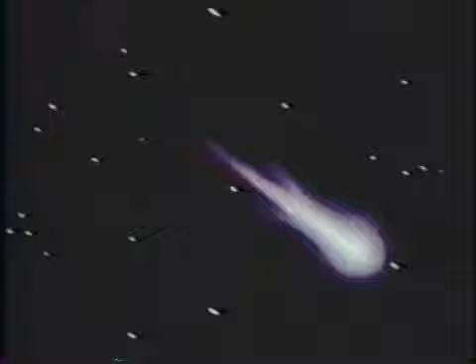There was a time when a meteor flashing through the sky struck man with a deep sense of wonder. Even today, man's reaction to a meteoric display is likely to jam the switchboards with reports of imminent invasion from space. But as heirs to the knowledge, disciplines, and apparatus of the scientific revolution, we are familiar with, and at least partially understand, the meteoric phenomena.

A meteoroid traveling in space outside our atmosphere remains unseen by man, for the molecules in space are so dispersed that collision with them causes no visible effect. If its trajectory traverses the Earth's atmosphere, it becomes a meteor. Here it begins to collide with more molecules. These collisions become more and more frequent as the meteor descends into the denser air of lower altitudes, causing it

to decelerate. Each collision converts some of the energy of motion into heat energy, and the heat continues to increase until the meteor itself becomes incandescent, scribing its visible path through the night sky. Destroyed in the atmosphere by this heating, most meteors present no danger to man. Now and then, one is large enough to survive its passage through the atmosphere to Earth. It is then called a meteorite, and some are very large indeed.

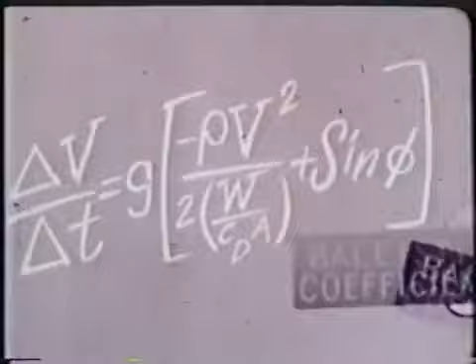Dr. Peter Parameter became interested in meteors early in his career, and once wrote a paper titled, "A thermokinetic description of bodies in passage through a plastic medium of nonlinear density at random velocities and angles," which could be just about summed up with this equation. With this equation, his fellow scientists and designers are able to explain the effects of atmospheric penetration on differing bodies, those with different ballistic coefficients, at various velocities and angles.

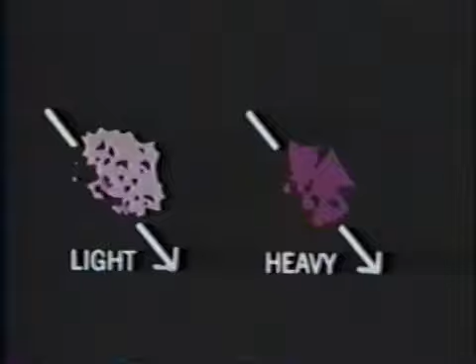For example, if two bodies of different weights enter the Earth's atmosphere with the same velocity and entry angle, both the heavy body and the light one will begin to heat up at the same time. But impacts of air molecules slow the light body sooner. This deceleration of the light body occurs at higher altitudes, while the heavier, more energetic body penetrates deeper before it reaches peak deceleration. The total amount of heat generated by the lighter one is less than that generated by the heavy one, whose larger mass gives it greater kinetic energy.

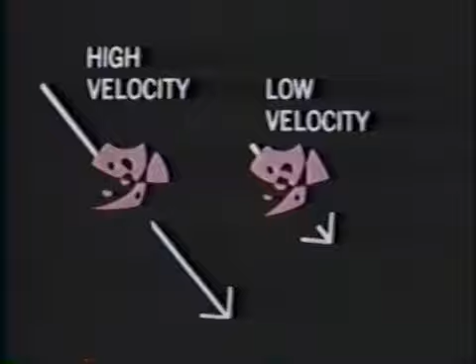Two identical bodies with the same velocity entering the atmosphere at different angles also will decelerate at different rates. The steeper angle causes a more rapid encounter with the dense air, resulting in more abrupt deceleration. The total heat generated will be the same for both bodies, but peak heating will be less for the shallow entry. With identical meteors entering at the same angle but with different velocities, the faster meteor, under heavier bombardment by air molecules, will have greater deceleration, generating more heat and at a higher rate.

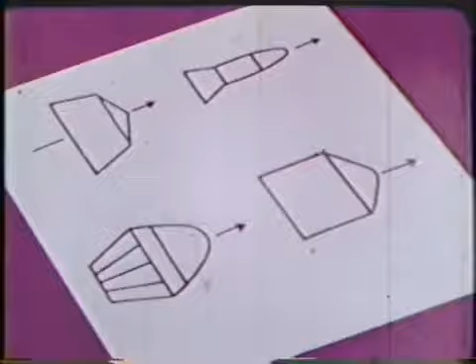But Dr. Parameter is no longer merely an observer interested in understanding the phenomena of meteors. A meteor is just an aimless traveler in space. Doc finds himself now involved in designs with a purpose and an aim. A missile has a target, and a spacecraft has a destination, a journey's end. To these, Doc applies his knowledge. He knows natural phenomena, both of aimless meteor and aimed missile. He knows that as they traverse the atmosphere, they heat up. If the heating or deceleration of a vehicle is excessive, the mission is threatened.

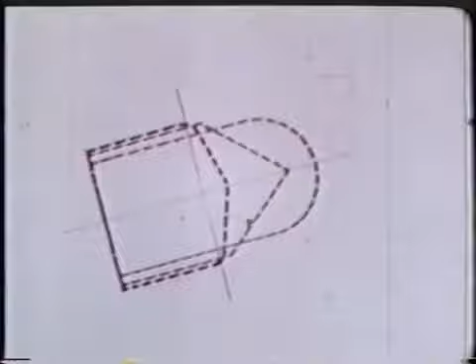Man cannot change the laws of nature, so he must use his knowledge to work within those laws. Doc Parameter knows that the two natural enemies to successful atmospheric penetration are deceleration and heat. He can fight these enemies on two possible fronts. First, on the design front, by modifying the vehicle's shape and size relative to its weight. In other words, its ballistic coefficient. And second, on the program front, by altering the vehicle's trajectory, its velocity, its attitude, and its angle of entry into the Earth's atmosphere.

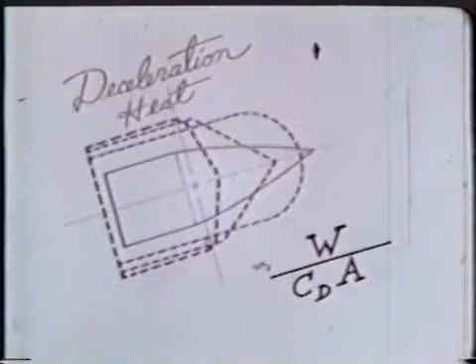Dr. Parameter is now ready to use his technology to plan a successful re-entry for an ICBM warhead. He knows that of the two natural enemies, deceleration and heat, high deceleration is not a problem with a warhead, but too much heat could destroy it. He first surveys the project on the program front. He knows that the re-entry velocities and angles are essentially set by the mission.

But to reduce heat load, the velocity of the re-entry vehicle could theoretically be reduced by firing a retro rocket. On investigation, he finds that in order to decrease re-entry velocities sufficiently by this method, a retro thrust system would be required weighing many times the weight of the warhead. This method is out.

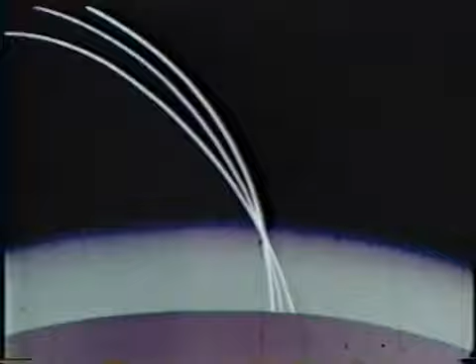He next considers the possibility of changing the re-entry angle. He knows that a shallow angle will lessen the peak heat load by stretching the heating over a longer period of time. But the total heat generated will be the same either way, and the vehicle could absorb even more heat during this longer re-entry. Furthermore, a shallow re-entry angle has other serious drawbacks.

First, a shallow angle impairs accuracy by deflection in the atmosphere. Second, it affords more time for enemy interception. A steep re-entry improves the missile's chances of avoiding interception and of reaching its target with minimum atmospheric deflection. In this case, altering the program is not the answer to the heat problem. Dr. Parameter must attack the problem of heat on the design front.

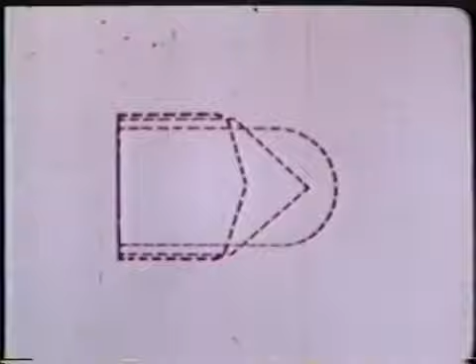Logic would seem to indicate that fast travel requires a streamlined shape to slice its way through the air. At subsonic velocities, this is true, but at supersonic speeds, the moving vehicle displaces air molecules which bounce off, forming a shock wave. As speed increases, the shock wave becomes more severe, and heating increases.

An ICBM will have a free-fall re-entry speed in excess of 23,000 feet per second. At this speed, the heat of molecular collision and friction, shearing of air molecules, is concentrated in a narrow zone along the surface of a streamlined vehicle. The heat generated may cause the temperature to exceed 15,000 degrees Fahrenheit. To combat this terrific heat, Dr. Parameter designs instead a re-entry vehicle with a blunt frontal area.

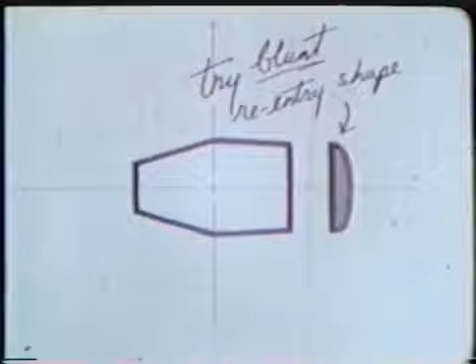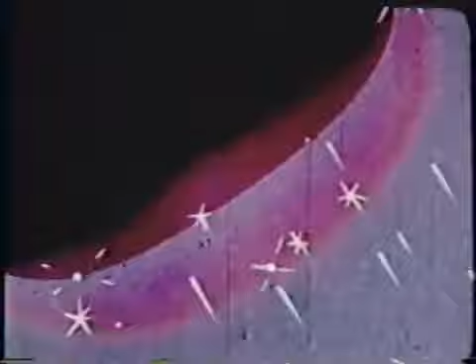The blunt shape creates its shock wave somewhat ahead of the vehicle. This occurs because the atmospheric molecules colliding with its frontal surface bounce back and intercept others coming in, setting up a kind of picket line in advance of the warhead. The peak heat is generated in this area away from the surface of the vehicle.

Although the blunt shape decreases the peak heating of the warhead to half that of the streamlined shape, it will still heat up to 7,000 degrees Fahrenheit, much too hot for unprotected warhead structures. To further reduce heating, Dr. Parameter must find other techniques in addition to the blunt shape. His first solution is the heat sink.

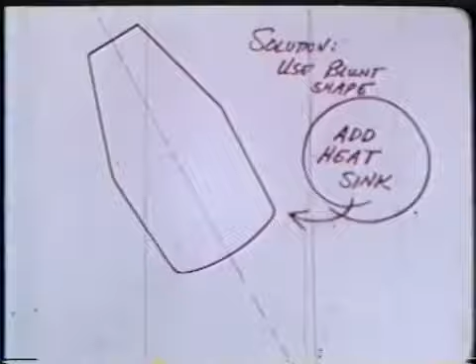Use the blunt design and add a mass of heat-conducting metal large enough to absorb most of the heat generated during re-entry without melting before impact. It works, but he is not yet satisfied. The weight of the heat sink displaces more than 1/4 of the payload. Furthermore, the blunt design slows the missile, keeping it in the atmosphere a longer time, making it less accurate and easier to intercept.

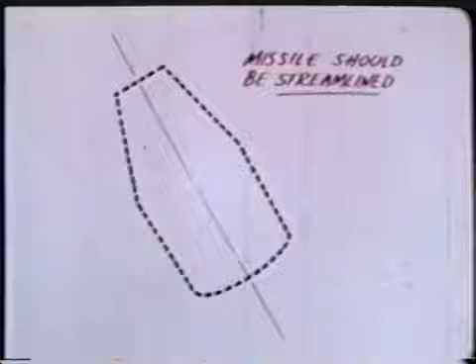For the greatest accuracy and shortest time in the atmosphere, Doc knows that the streamlined shape is the best, but the heat sink cannot absorb and distribute the sudden extreme heat generated during the re-entry of a streamlined vehicle. Doc reasons, if the heat cannot be absorbed, why not eject it as fast as it's generated? The answer is ablation. Ablation! Coat the frontal surface of the streamlined missile with layers of ablative material composed of fibers, resins, and ceramics.

This ablative coating protects the missile from the extreme heat in several ways. It is a poor heat conductor. Its surface gradually melts away, taking heat with it, and its vapor forms a thin insulating layer, deflecting some of the heat from the surface. The ablative principle combats the heat problem effectively and permits steeper re-entry angles while adding a minimum of weight. The streamlined missile, with its increased speed, affords the least possibility of interception and the greatest accuracy.

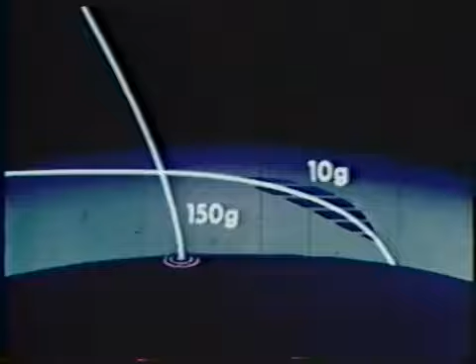It does produce a huge deceleration factor approaching 150 Gs. Fortunately, this poses no threat to a warhead. But for manned or other recovery missions, the G load is a most important factor. For manned re-entry, this force should be held below 10 Gs. A shallow re-entry angle of about 1 to 5 degrees is the simple answer. The shallower the angle, the less the G load. But this will be sustained over a longer period of time. This means a longer time at high speed through the friction of the atmosphere. Let's take a moment to see why this is not desirable.

Dr. Parameter? Thank you. Gentlemen, we have here a kettle of water. Heathcliff, we can use you in this experiment. Oh boy, an experiment.

Thank you, sir. Now, if we may have another kettle of water and your stand-in. Thank you. Now we'll proceed with the experiment. Experiment? We'll add the same amount of fuel under each kettle, but alter the form of the fuel under one kettle to make it burn faster. We ignite both at the same time and compare the results. Splendid.

I'd like to point out that the fast-burning fuel, although reaching its intensity quickly, exhausted itself quickly. The heat absorbed was negligible. The slow-burning fuel, on the other hand, gradually increases in intensity. It will generate the same total heat load, but over a longer period of time. And you'll notice more heat is absorbed. Thank you, Heathcliff. Thank you, Dr.

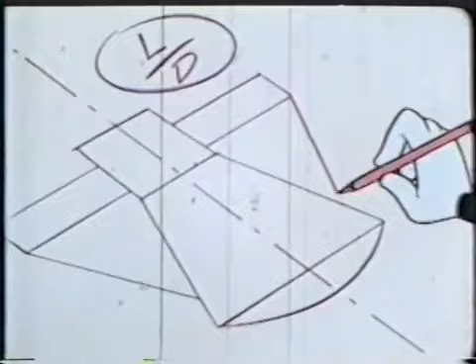The doc is confident his new design will fulfill the requirements. Now to try it out. He wants low peak deceleration, so the shallow re-entry path is mandatory. This brings him down safely, if a little off target. To achieve some control and accuracy as well as safety, Dr. Parameter has been working on other design concepts, particularly shapes that produce lift.

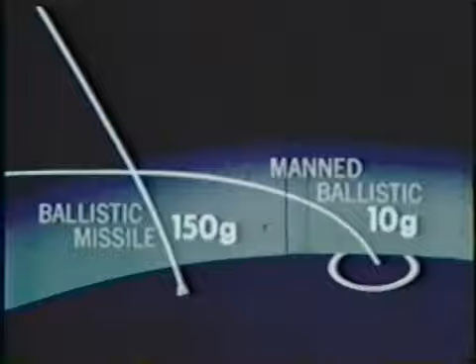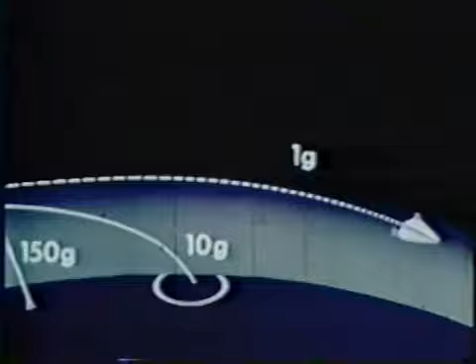He knows that a ballistic missile is designed and programmed to hit a particular point on the Earth's surface. A manned ballistic vehicle with the same objective is much less accurate due to its design and long, shallow penetration. But a lifting vehicle, which is capable of descending at a still more shallow angle and with an extremely low deceleration rate, is able to change direction. This control gives it wide selectivity of landing sites within a large footprint area.

For the shortest range within the footprint, the vehicle is pulled up into a maximum lift attitude at re-entry. This induces maximum drag, causing a steeper, more abrupt descent. For the longest possible range, the vehicle must assume the attitude of maximum lift over drag ratio. This footprint, huge at first, shrinks gradually as the vehicle descends.

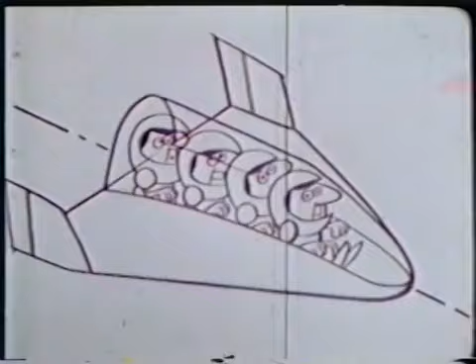Dr. Parameter, while considering the advantages of lifting vehicles, is also aware of their drawbacks. First, the lifting structure itself imposes weight penalties, which compete with the all-important matter of payload. Then, lifting vehicles may also spend up to 20 minutes in the heat regime, and being more streamlined, they require a still more complex heat protection system, competing still further with payload.

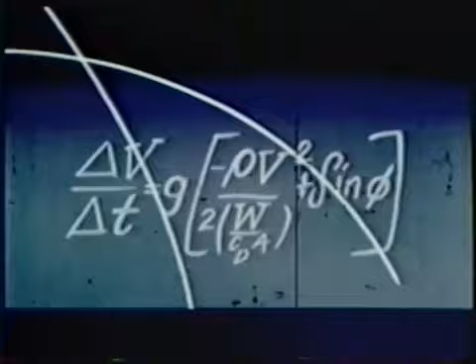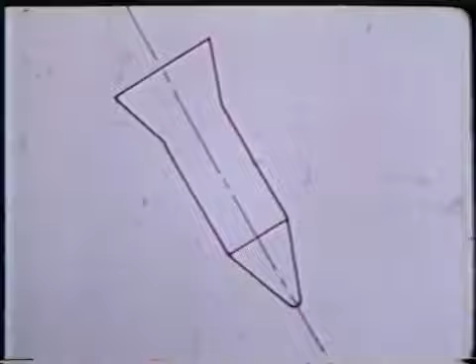Dr. Parameter, with his associates, has studied the strategy of atmospheric penetration. He knows its natural enemies, deceleration and heat, and has met them on the two fronts of program and design. He has accomplished important objectives. For the intercontinental ballistic missile, the objectives are rapid atmospheric penetration and accuracy. The warhead's natural enemy is sudden, intense heat. Its program? High velocity, steep re-entry. Its design, streamlined with ablation to combat sudden heat.

For a manned or other recovery mission, the objectives are, first of all, safety, and then control. The mission's natural enemies, high deceleration, sustained heat. Its program, shallow re-entry for low deceleration. The vehicle's design, blunt, yet with control capabilities, a maneuverable lifting shape. The resulting long duration within the heat regime exacts a weight penalty because a complex heat protection system is needed.

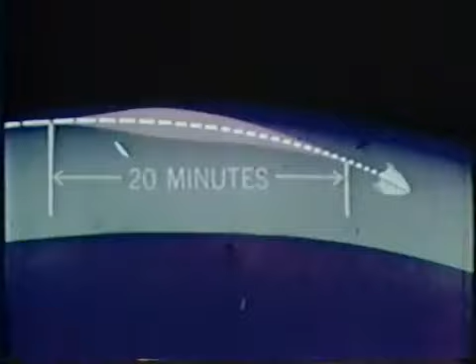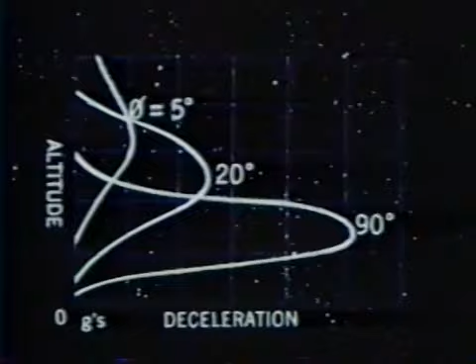There will always be problems to solve. Dr. Parameter has worked out successful compromises so far, but he is still puzzling, still exploring. He plots his graphs, his curves, and flings them boldly into space. But he knows that we have barely gotten our little toe into space, and he constantly seeks to improve that toehold. He must hold to the possible, yet he constantly works along its impossible edges. He has opened the way for man's safe re-entry into the Earth's atmosphere. Journey's end for space travel.